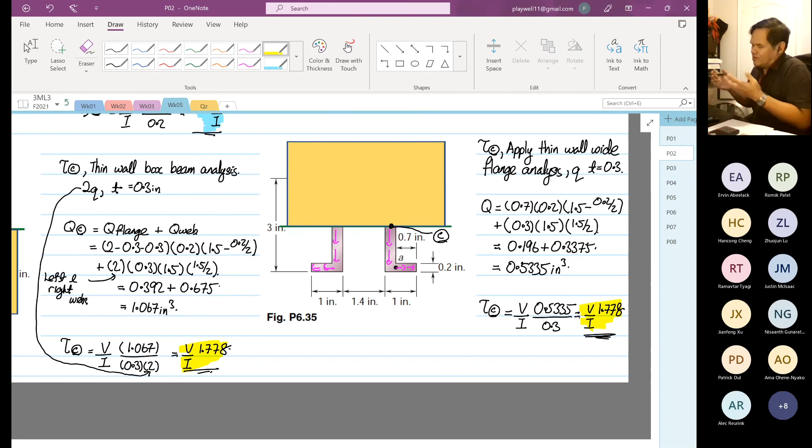The more confident you are in your cooking, why? It tastes better, right? So the thing about strength of materials is you have to have the confidence. Once you have the confidence, I want you all to have that confidence. I can see some of you do already, which is good. Once you have the confidence, then you are not worried.

Should I take the analysis from the top? Should I take it from the bottom? The answer is the same. But I want you to try on your own. The solution manual is good and bad, right? The solution is there, I just follow it. But then you do not have that confidence.

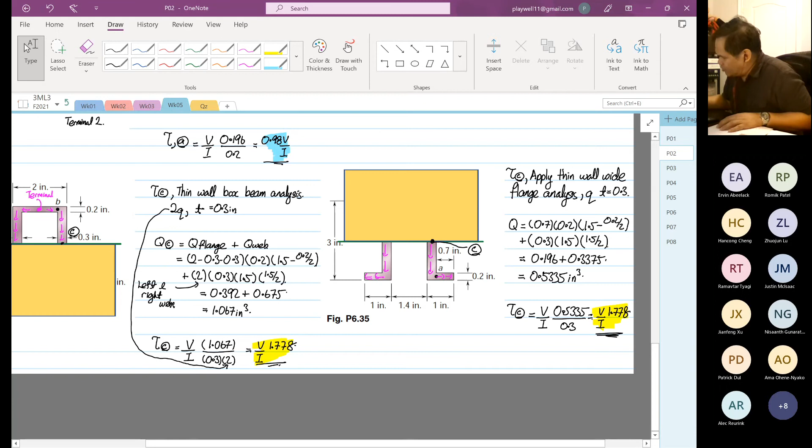Right. So if we tabulate all the data now, the shear stress at A is equal to the shear stress at B, which is equal to, I think it was, 0.98 V over I. The shear stress at point C, which is thus discovered, is 1.778. So from here, what we realize is that stress at C is much greater than shear stress at point A and at point B, right?

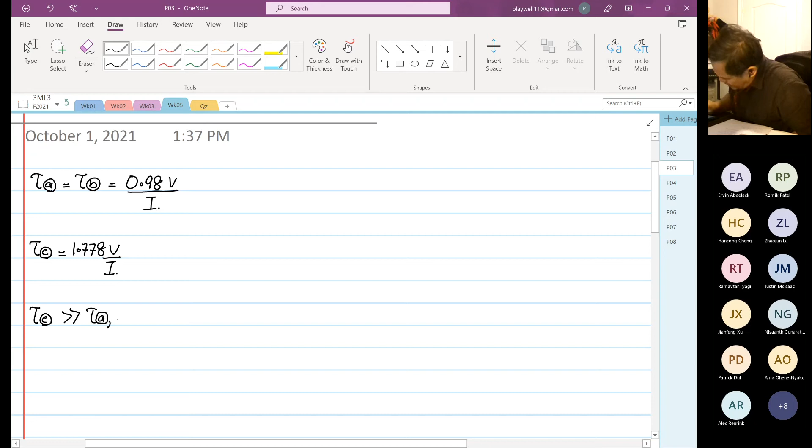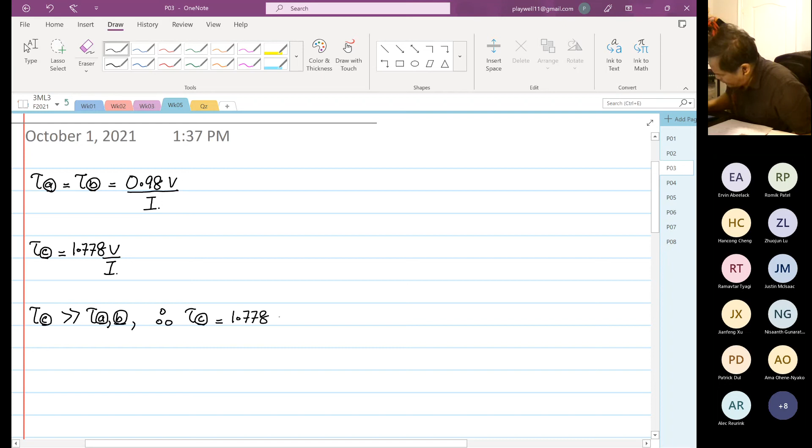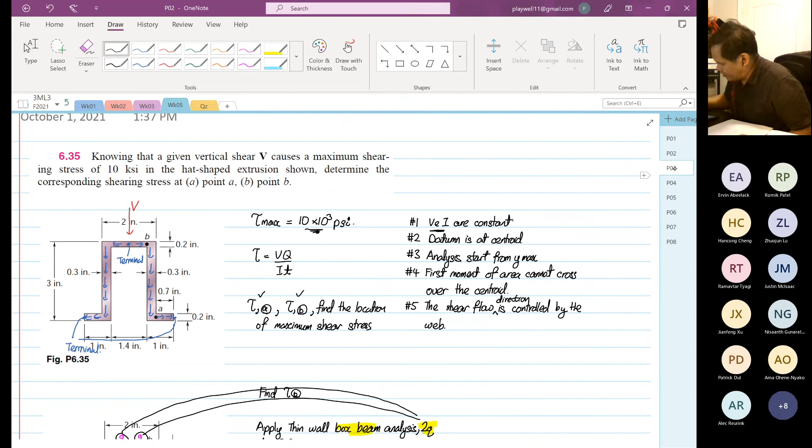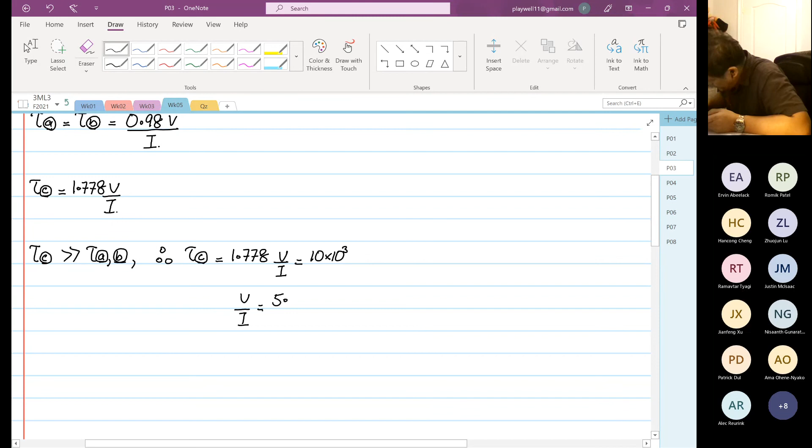So therefore, shear stress at C is equal to 1.778 V over I, and this is equal to 10 times 10 to the power 3. Is it 10? I can't remember now. Let me search. Yeah, 10 times 10 to the power 3 psi. So the V over I ratio is equal to 10 times 10 to the power 3 divided by 1.778, which is equal to 5.624 times 10 to the power 3. I'll do it again: 10 to the power 3 divided by 1.778 is 5.624.

So therefore, the shear stress at point A, which is equal to the shear stress at point B, will be equal to, not 1.778, it's equal to 0.98 multiplied by 5.624 times 10 to the power 3. So 0.98 times 5.624 times 10 to the power 3 is equal to, I get 5.511, psi. Okay, so this is your answer.

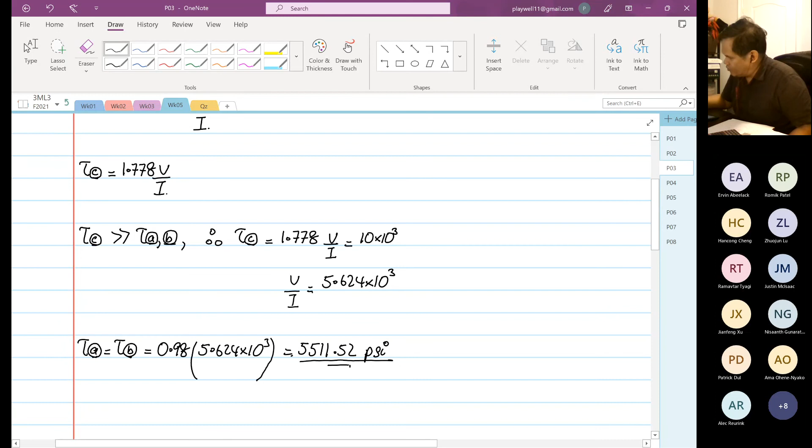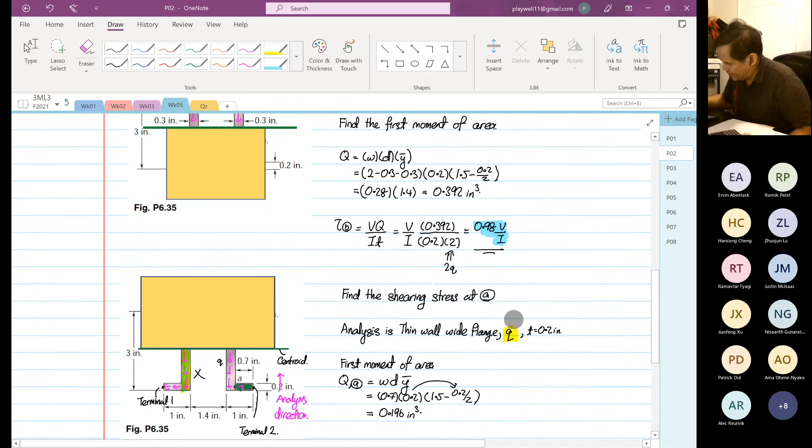So what is so unique about this problem, as you can see? Go on, I have to put this down, my bad, pardon me. So this is your example number 2. What is so unique about this problem? Why do I like this problem? Because the structure combines box beam and wide flange analysis. That's why I like this problem.

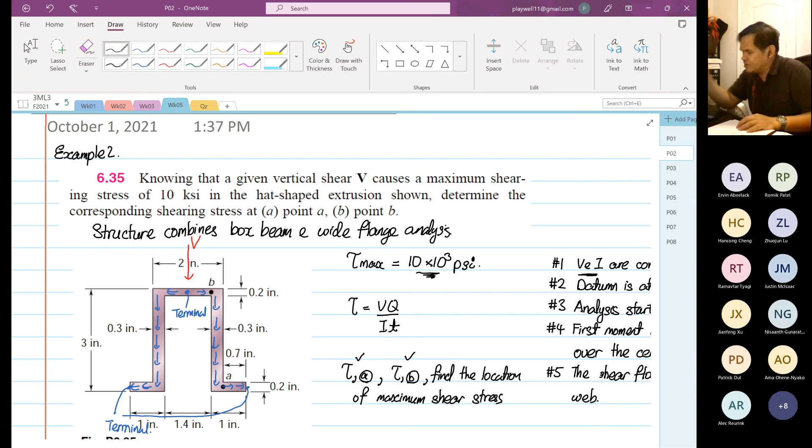You can see what is the difference with the two. If I just give you an I beam or a box, it's easy now, right? Now you can combine them. I'll tell you this: a lot of universities usually just skip this topic. They don't like to teach this topic. Why? Because this topic is very abstract. Why abstract? Because the formula is still VQ over IT. If you have this formula without knowing these rules, it's confusing as hell. Trust me, I've been confused before.

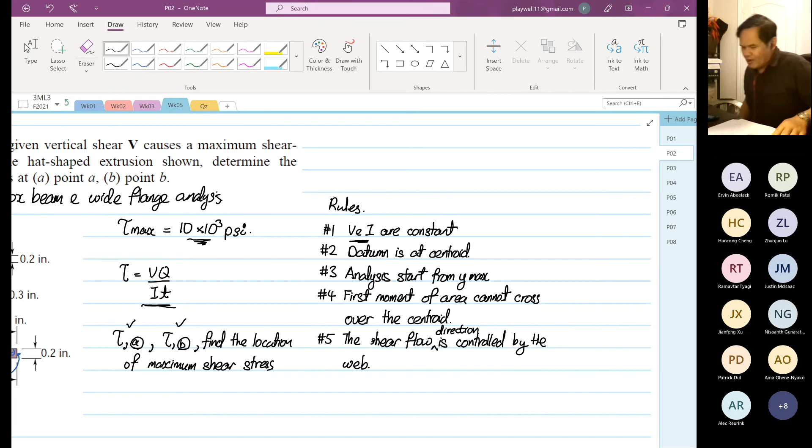Now I'm going to make matters worse for you. We're going to try a different problem. So before I go on, any questions, please? Anyone?

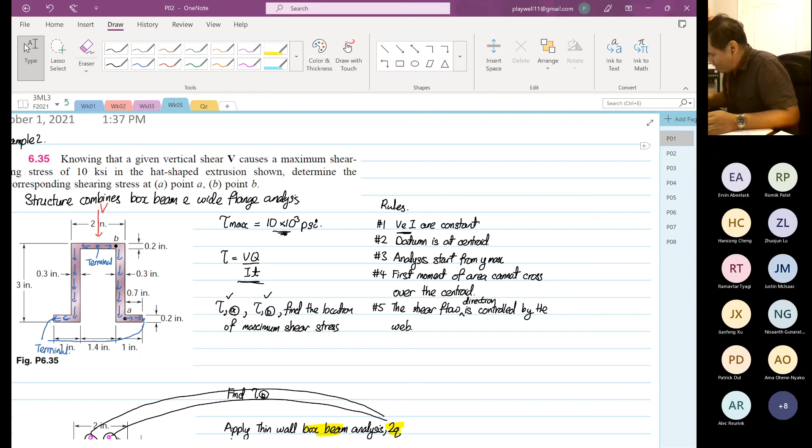I have a question regarding the thin wall and thick wall analysis. It seems that depending on the geometry of the structure, they can have similar results or they can be very different. Yes, you are absolutely right. Like what I've shown you before, over here, at point A is different, but at point B, if the geometry is exactly the same but you do a different analysis, the results can be exactly the same.

So why do we do one over the other then? It's geometry. If the wall is thin, you have to use thin wall analysis. If the wall is thick, you use the thick one. It's purely geometry based. If you are not sure, go for thin wall, because the stresses will be higher, yes or no? Right.

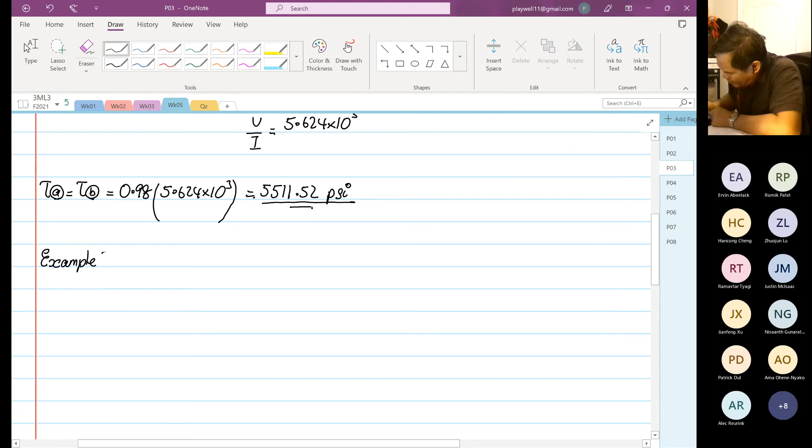Now I will do example number 2. In fact, the question was a good lead in to example number 2. So example number 2 is this question.

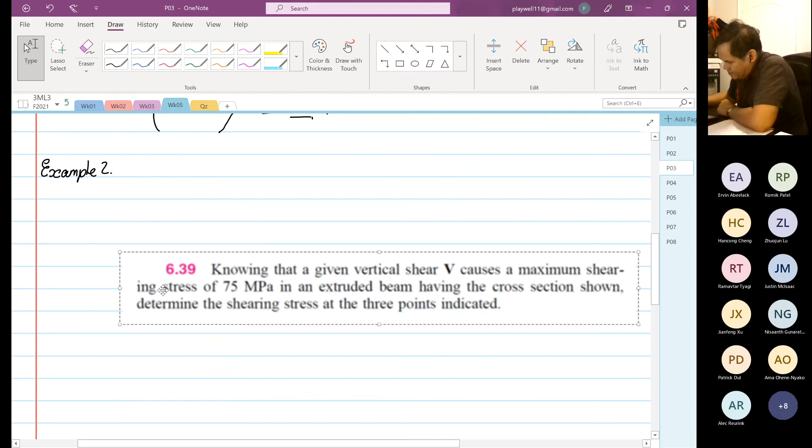And can anyone tell me why I like this question? Anyone? So if you look at the structure like this, right? Okay. Let me show you what's going on first, okay? And then you tell me why. I think then you all will know why I love this problem.

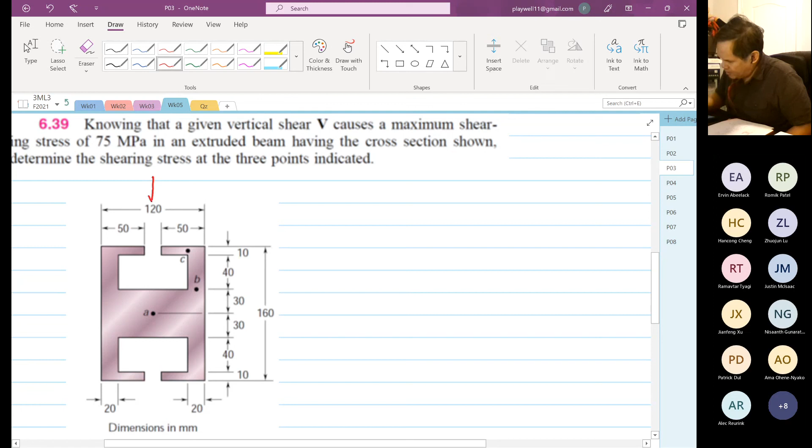Okay. We know that the shear force V is coming from here. So this problem is very similar to what we've just done. Again, given that the maximum shearing stress is 75, okay? Determine the stresses at point A, point B, point C. Very similar, okay? And anyone tell me why? Anyone tell me why I love this problem? Anyone?

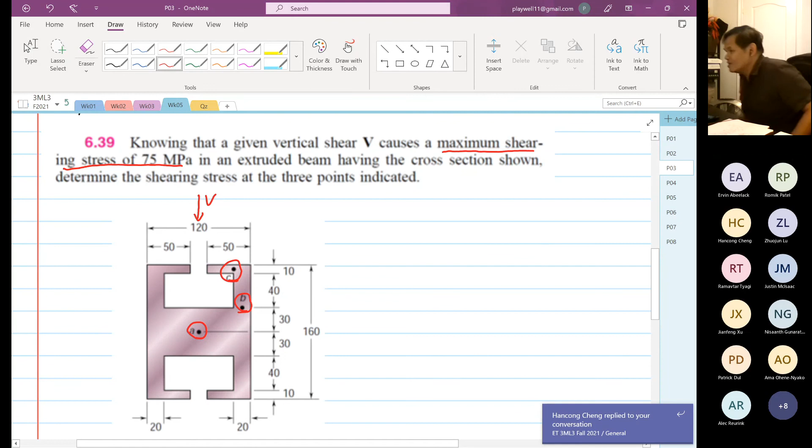Maybe because of the geometry of the diagram is symmetrical? No. It's symmetrical because what I told you is symmetrical for now. Okay. But why do I like this? Hancong, you're right. Combination of what? You're absolutely right. We have a box beam wide flange analysis as well as the thin and thick wall analysis. Is that... No, it's not. It's going to be wide flange. Okay, for sure, it's going to be wide flange.

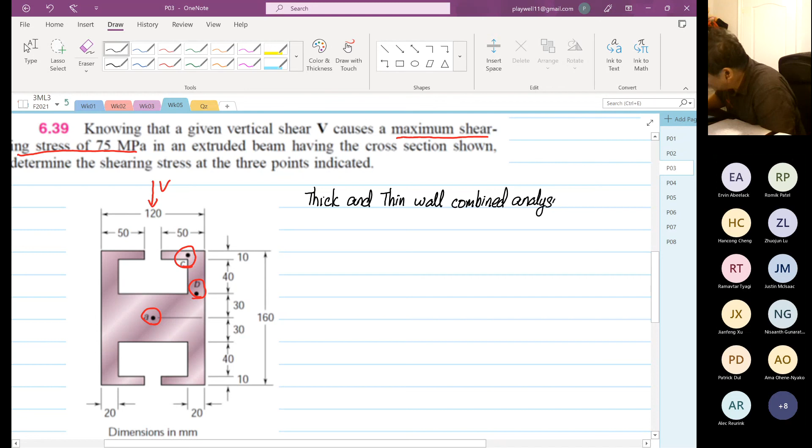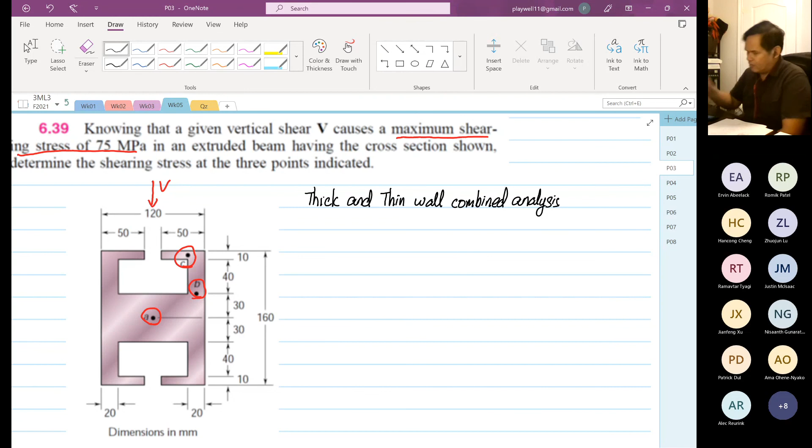Okay, but why this problem is interesting is thick and what? Combined analysis. Okay, thick and thin wall combined analysis. That's why I love this problem. So once again, if you understand the concept well, okay, which I believe all of you can understand the concept well, this question is easy. Okay, and I'll show you why. Okay, so let me copy this diagram first.

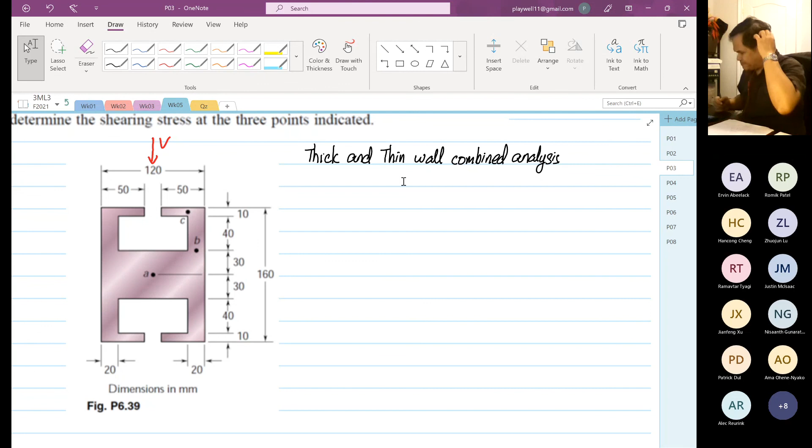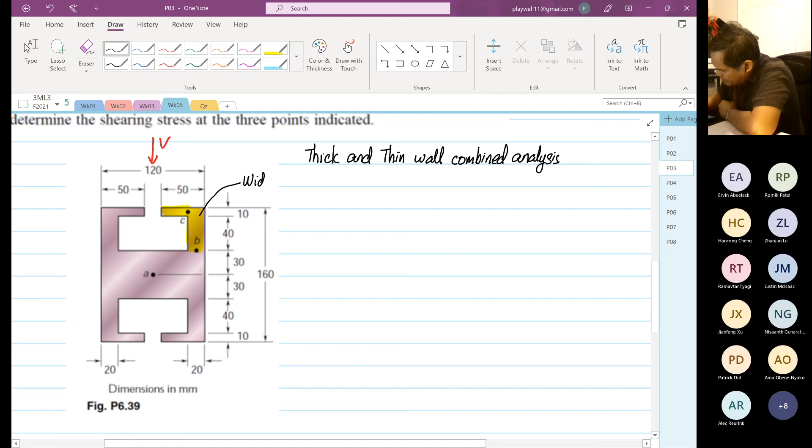So until where is thin wall and until where is thick wall? Right? Where is it thin wall and where is it thick wall analysis, right? Okay. There's only one part that is actually true. There are 2 points, not 1 point, that is thin wall analysis. That is point B and point C. So from here to here, I'm going to color in yellow. Okay. From there to there, down here is wide flange, thin wall analysis.

All right. And then when you have this section coming in, which I'm trying to, you can see it's coloring in blue, right? Yeah, I'm partial colorblind, can't really see at all. Right. So over here, we switch to thick wall analysis. And all he has to do is thickness, right? All he has to do is just the thickness. Okay. So now, first of all, if we construct the shear flow, okay, the shear flow is controlled by the web, right? So the shear flow will go down.

So you can see over here, you have a terminal over here. You have 2 terminals over here, right? Terminal 1, terminal number 2. So that's why it's a wide flange. Yeah, you can apply. So hold on, you can apply for the whole section. Even at point A, your answer will still be right because of the wall thickness. Okay, you can, but you cannot apply thin wall for the whole section. Okay, you cannot apply thin wall for the whole section.

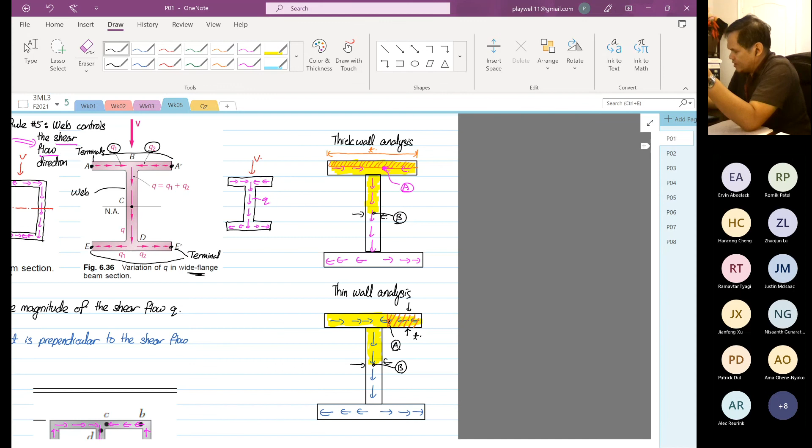Wait, Azam, I have to be careful over here because if we apply thick wall analysis, yeah, you still consider the both area, okay? But yeah, at point A is thick wall analysis and thin wall is still the same, like what I mentioned before. At the centroid, whether you apply thick wall and thin wall, the answer will be the same, okay? Glad that you're applying what you have just learned.

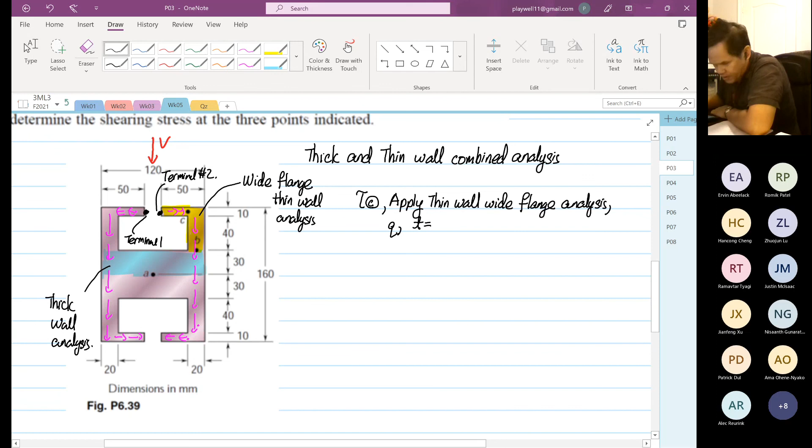Okay, now, so now we're going to find the shear stress at point C. So we are going to apply thin wall. Okay, we apply thin wall, wide flange analysis. There's only one Q. And now the thickness is 0.01 meter. Okay, that is the thickness. So the area that we are going to focus on is this area now. Okay, it's that area.

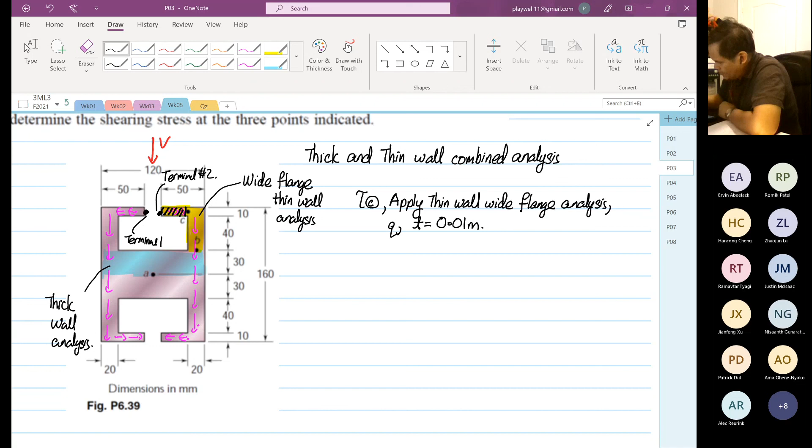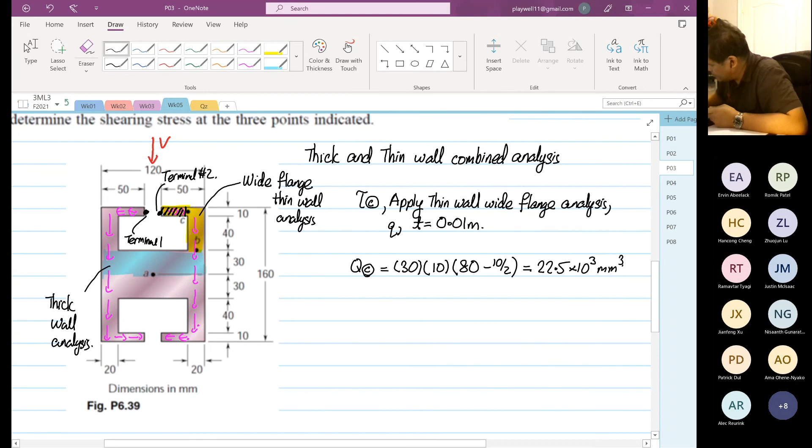So the Q at point C, the width is 30, the depth is 10, the centroid is 80, right? Because it's 160 divided by 2 minus 10 divided by 2. Okay, so this will be equal to (80 minus 5) times 10 times 30. So it's 22.5 times 10 to the power 3 millimeter cube. And we have to change this to 22.5 times 10 to the power minus 6 meter cube. Okay. So from here, your shear stress at point C is equal to V over I